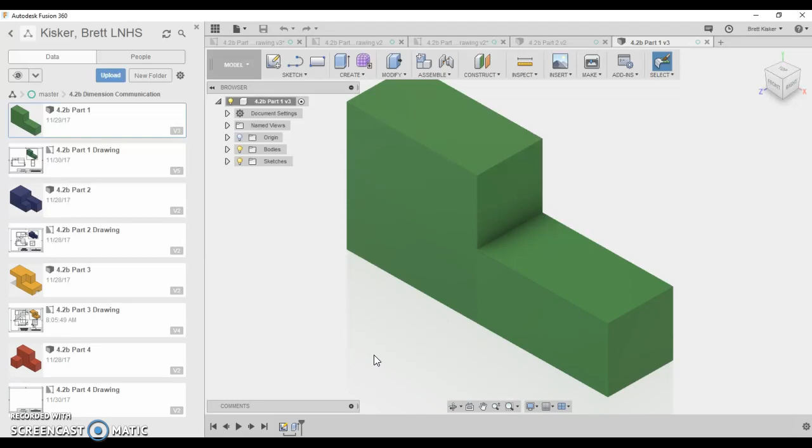Everybody, in this video, I'm going to walk you through how to set up a drawing file now that we have those templates from the last video that I've shared with you guys. So you should have a title block set up and ready to go for both English and metric parts. This part here is built in English units, so I'm going to draw then a new design from this file.

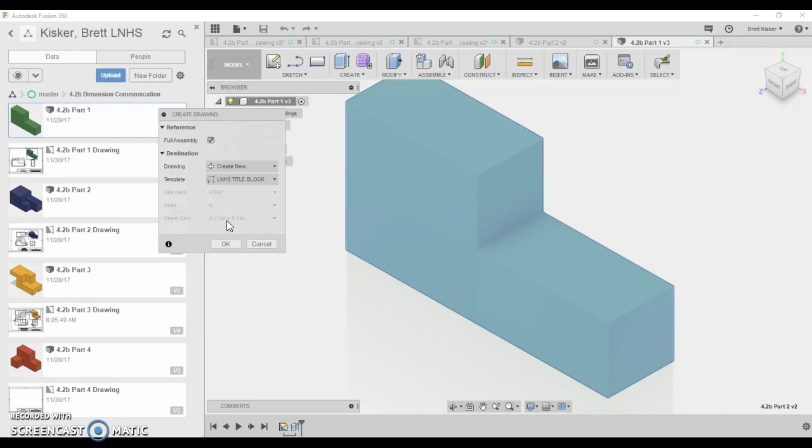I'm going to click on Model, Drawing from Design. And for the template, as opposed to making it from scratch, I'm going to go choose one of the title blocks. So I'm going to use LNHS title block as the one that I've set up. You'll notice that it says ASME is the standard. It's grayed out. I can't change this because of the title block that I've chosen, which means it's going to measure everything in inches, and it's got an A size sheet of paper, which is 8.5 by 11, but turned in landscape mode. So click OK, and it's going to pull up a new file.

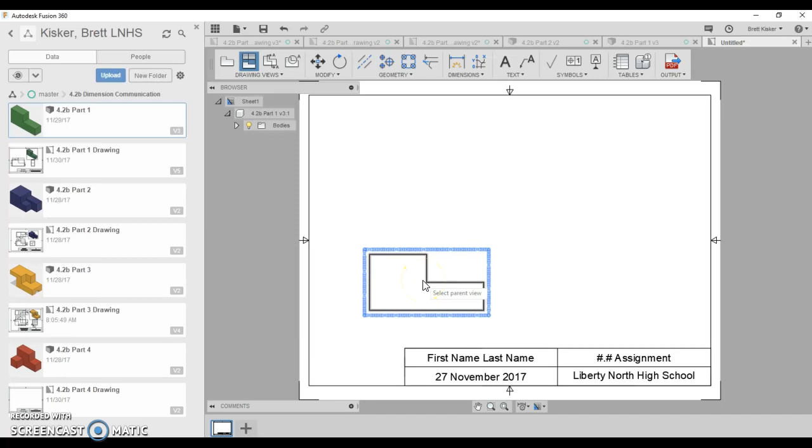It's very simple. It wants me to choose the size of the scale first, so I'm going to choose maybe 2. Okay, so that way it doesn't have a ton of blank space, but doesn't have a little blank space either. I'm going to choose OK. This is set up and ready to go. Now, as far as projected views go, I come up here and I can also use P on my keyboard. It wants to know which one do I want to project. I want to choose this front view. Come up here and click top view, right view, and isometric. Right click and choose OK.

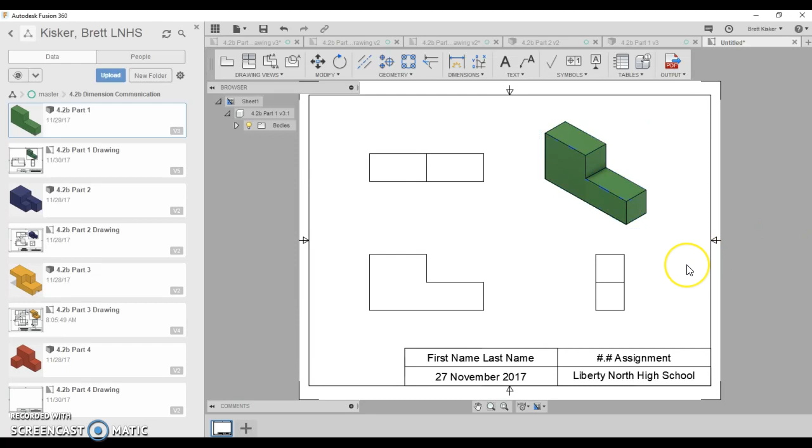The only thing that I don't like about this right now is I want this to be shaded so it looks like the hand-drawn version. So I'm going to double click on it. I'm going to change the appearance to shaded. And I'm going to click close. Now I can go through and I can start dimensioning. Dimensioning menu is right up here. I can do things like add the dimension for the top. 2 clicks will place that. 2 clicks will place this, so on and so forth. I know I showed that in a different video, so I'm not going to go any farther with it right now.

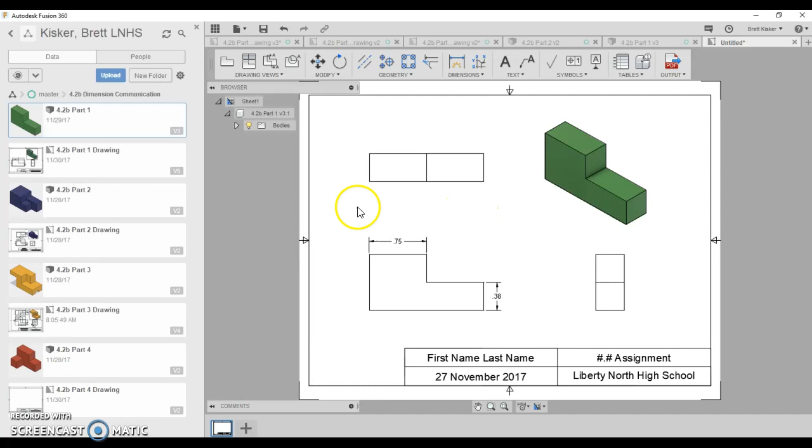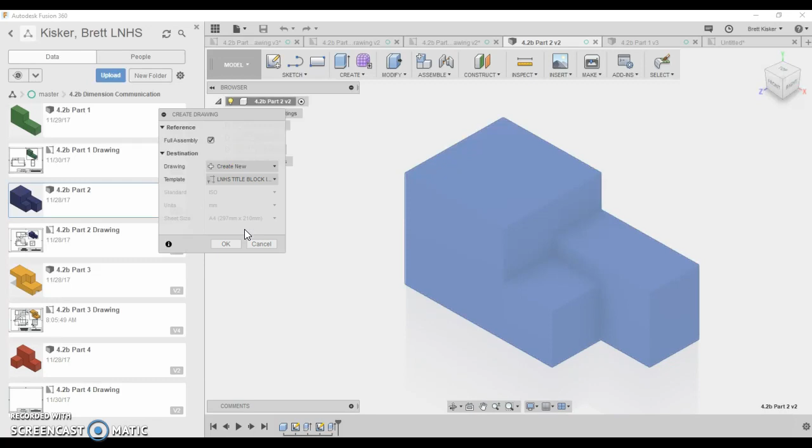Now here's the reason I really wanted to make this video though, is if we go look at the second part of this assignment, this part was built in metric units. And you would think that everything would be exactly the same, but there's a little twist in creating the drawing file for this. So I'm going to create model, drawing from design. We want to make sure that we use the ISO, the standard, the millimeters title block that I've set up for you, so the metric one. I'm going to click OK. Actually, this is the wrong title block because of this, but that's okay. We're going to change the scale here, maybe like 1.75, I think is what I've been using for this particular part. I'm going to click OK.

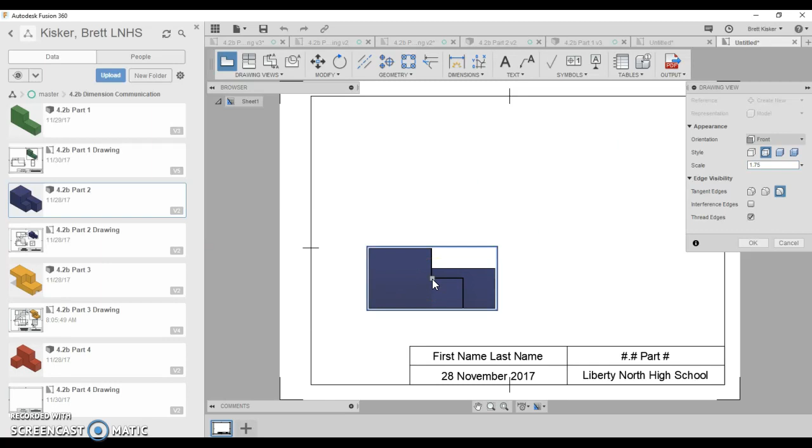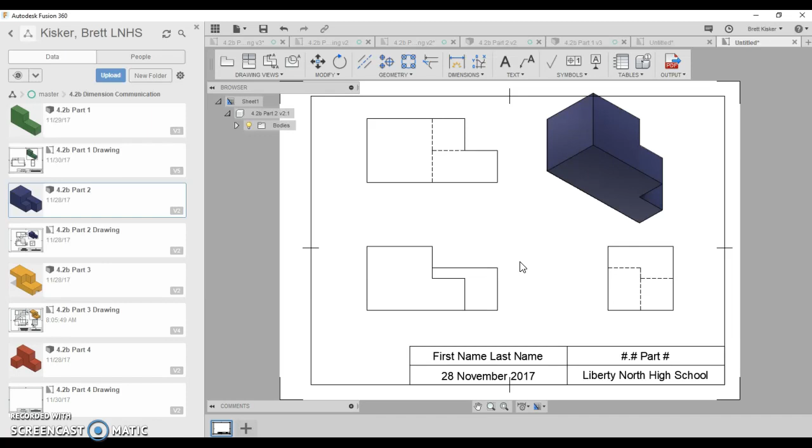And what you're going to notice is this. When I go to the projected view, just like I did in the last one, 2, 3 clicks, this is wrong. Things are wrong here, right? I've taken this part, and you can see that I'm looking at it from below now, right? So here's the front view, and it's below. And the reason is that every country except the United States uses a different kind of projection method to create their drawing sheets. And unfortunately with Fusion 360, at least at this point in time, we can't change that, okay? So we need a different workaround.

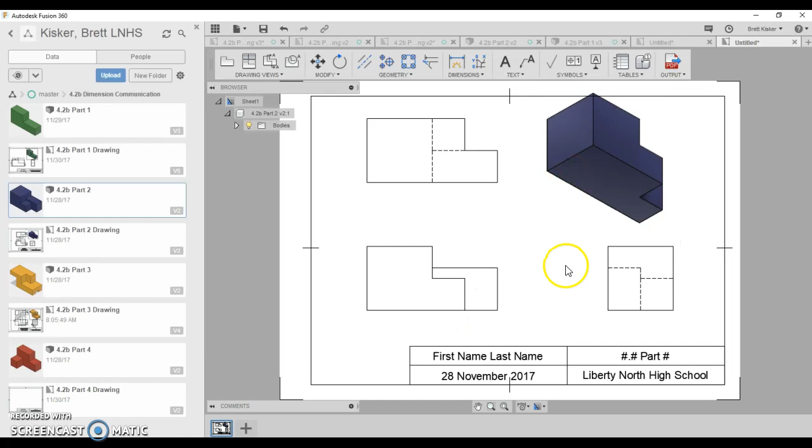The problem is this. When I project from this view, this is actually the bottom instead of the top. This is the left view instead of the right. And this is the bottom left instead of the top right. Okay, so what do we do in this situation? I'm going to hit Control-Z and undo that. Okay, there we go. Back to this. When I go through and I do my projections, the difference is this. It's an easy workaround. It's just kind of confusing the first time.

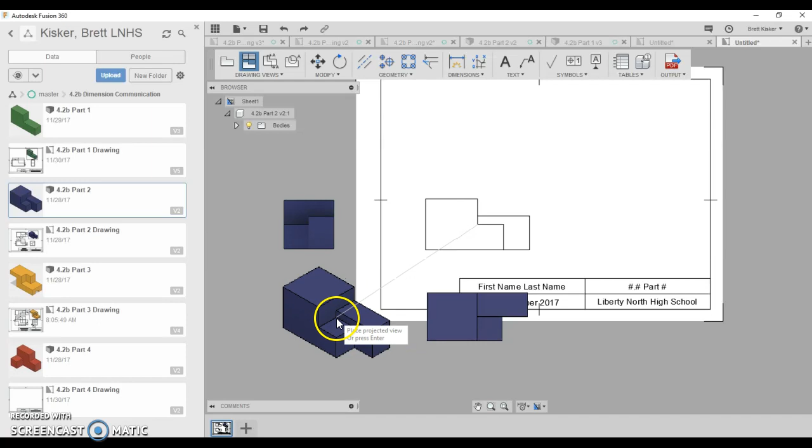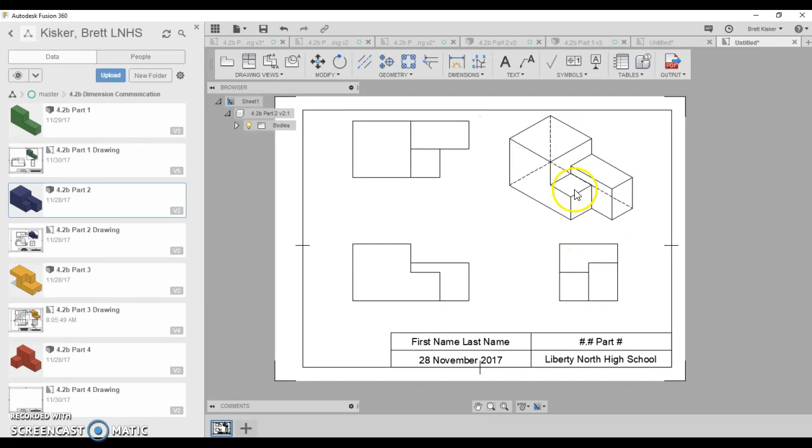When I do parts in metric with Fusion 360, I've got to click here, and instead of projecting up or right, I'm going to project left. Instead of projecting up, I'm going to project down. And then I'm also going to choose over here. Right click and OK. Now the parts are all correct. They're just in the wrong spot. I'm going to take them, grab the gray square here, slide it up. Take this one, grab it, slide it to the right. Take this one, grab it, and slide it to the top right. Now everything is in the correct orientation. Double click on this, shade it, and you're ready to start adding dimensions.

Again, so for every metric part, which luckily in this class we don't do a ton of them, but every metric part that we have, you're going to have to go through that method and project them the opposite direction and then slide them into the correct place to get going. So hopefully that makes sense. In the next video, I'm going to show you how you're going to turn in the files.